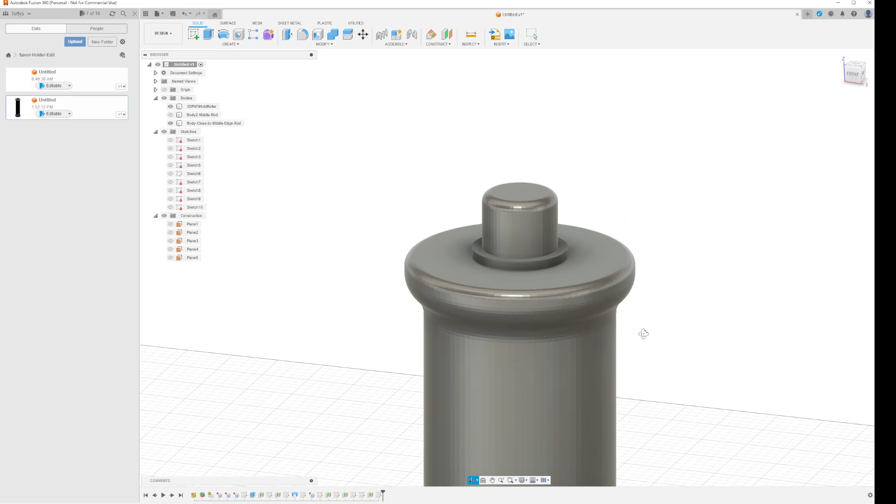If you see, I have a shape here in Fusion 360, and I want to replicate that shape more or less exactly as it is. Now, the best way you can do this is to use the points in 3D space. So I did that. Let's see if I can find a sketch. So you see, when I watch it from the right side, it looks perfect. And that's basically how I modeled it.

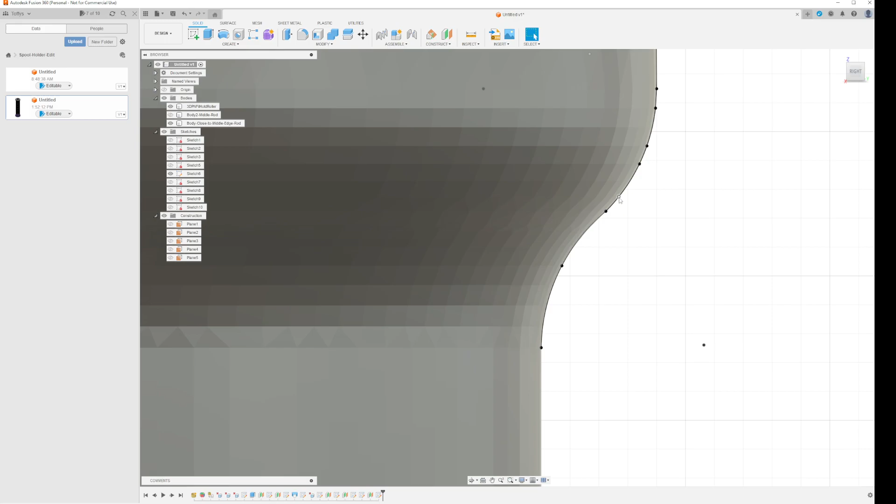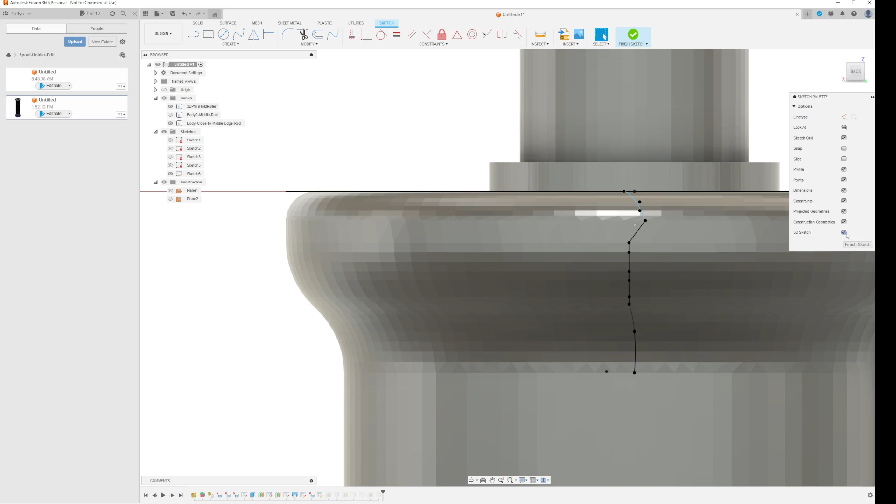I did like this, made a point, made a point, made a point, made a point. This is how the sketch looks when you see it from the right side when I drew it. But the problem comes when you want to create something with it, and you look from the other side, because you're drawing in 3D space. It looks like this. Now, how do you get everything on one single plane, one line, one axis?

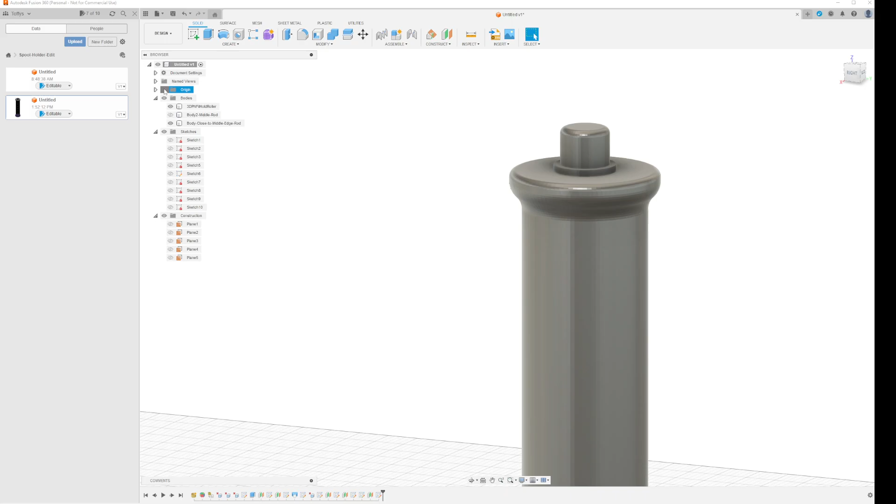I found one way to do this. Let's just first close down that one, and then I turn on origin, and you find the origin plane here. So you select the origin plane you want to use. In this case, I want to be on the green axis. See here, I want it to be on the green axis. And then, after I mark it, I go up to construct and I create offset plane.

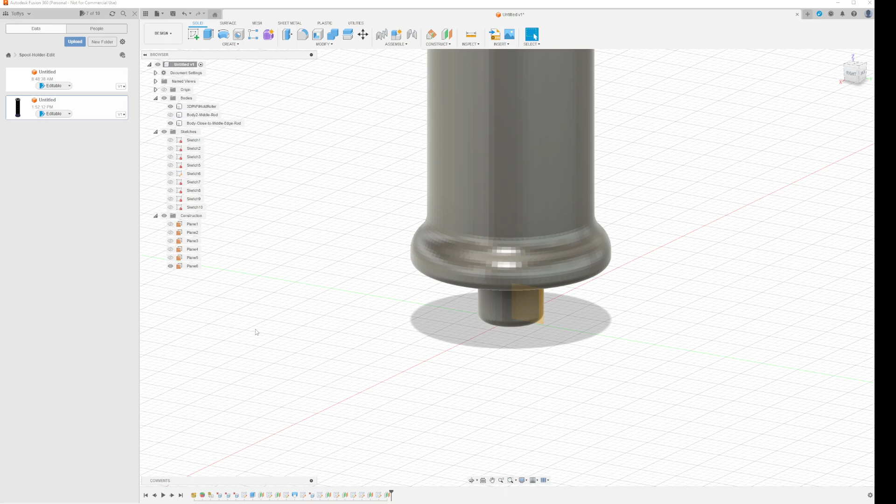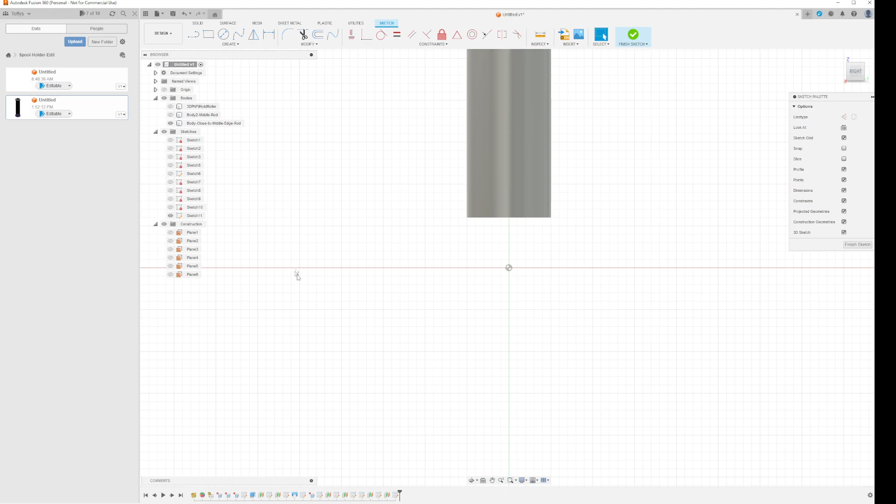And then leave it at 0. And then turn off origin. And now I have an offset plane at 0. So I disable the model, right click on that offset plane, create sketch. And now I have a sketch that revolves around the whole 3D space in that plane. Now, how do I get these points here? I want all of them to show in the same sketch, but at the same axis.

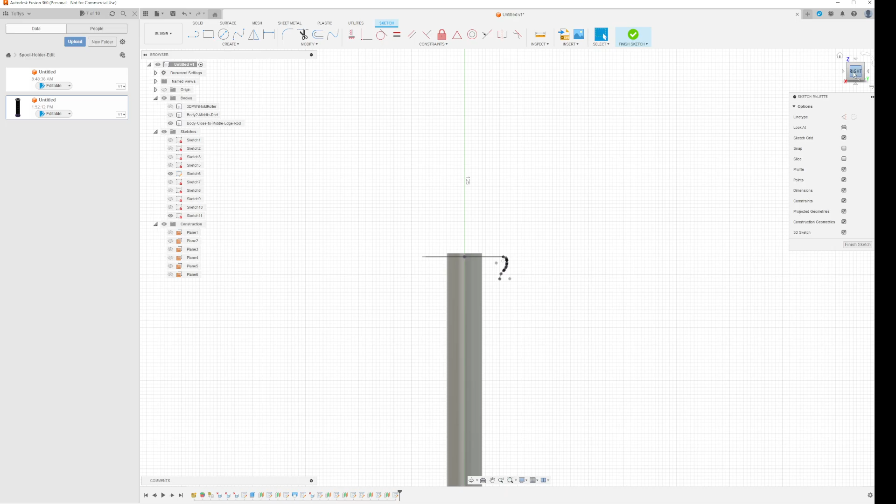So here, and then I need to find the model I have. Let's see, is it that? No, I didn't put names on this. There it is. So you make sure you're on the right space, you're oriented on the side, and then you click P for project, and you can either just select all the lines like I have done here, or if you also want the dots, you have to select them manually.

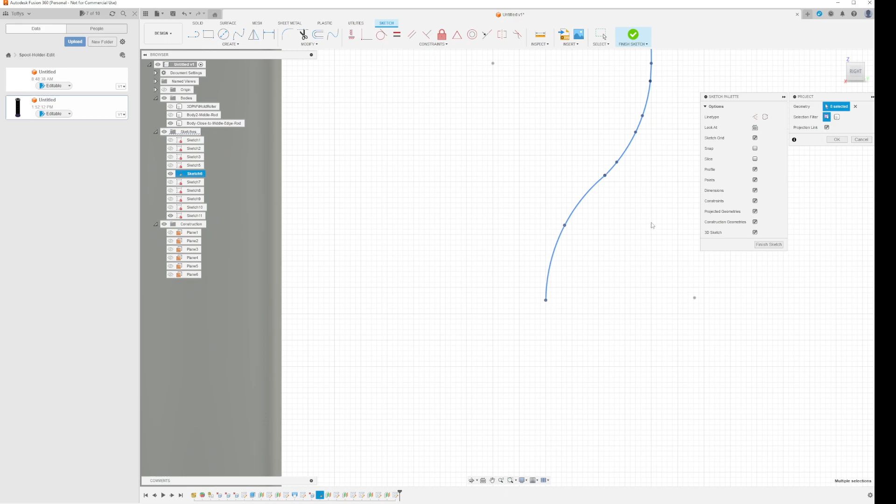Actually, there is another way to do this. You can just click select, freeform selection, just draw around it like this. Voila, now we have selected the points as well. And I don't want this, so I'll unselect that one. And then you click P for project. Now I have 51 selected. I don't want this. Anyway, I'll remove that later.

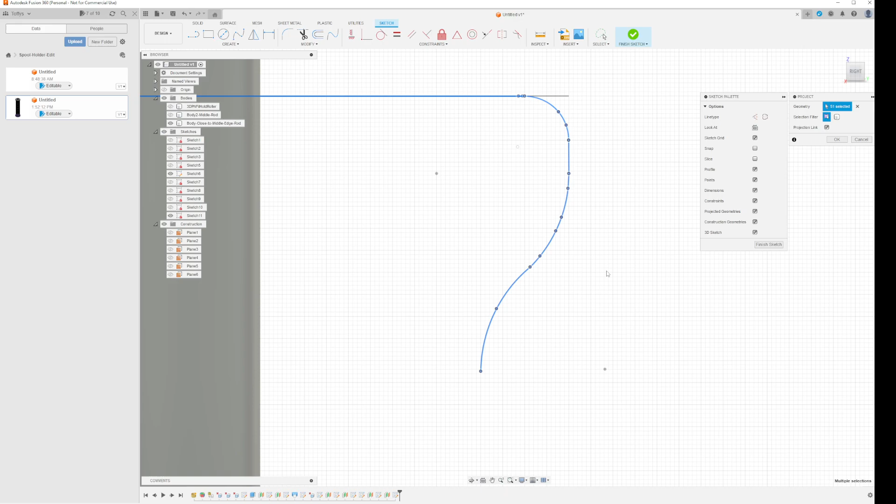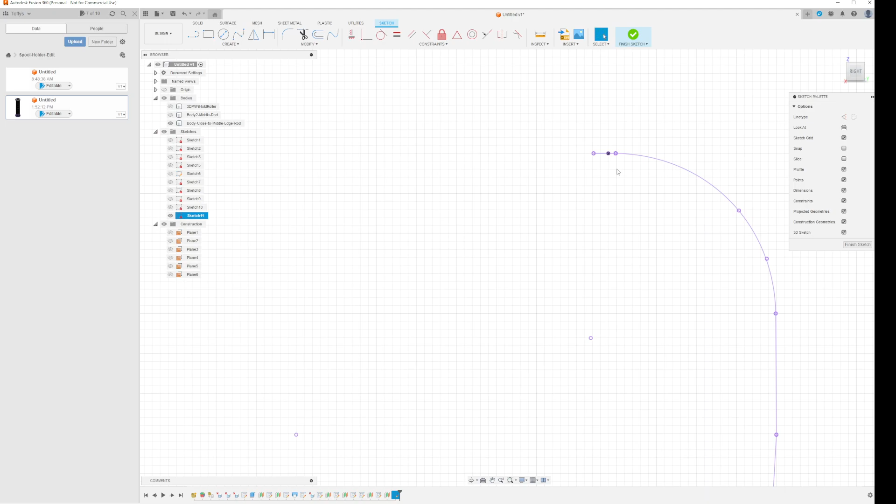So I have all of these selected now, and then I click OK for project, and you see I get it. Remember, I'm working on the sketch on the offset plane. And now I can go in and remove the previous one, because I don't really need it. And what happens now is that if I show this from the right side, it now has aligned all the points and the lines according to the right side, and it's actually all here.

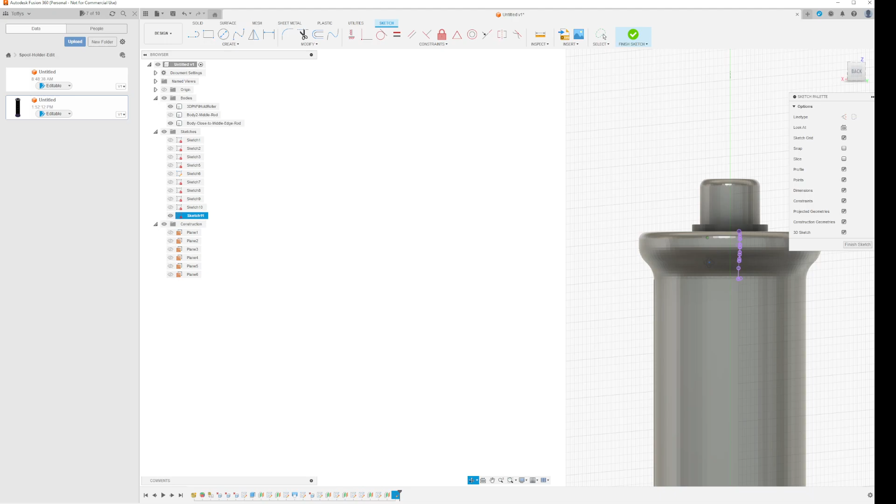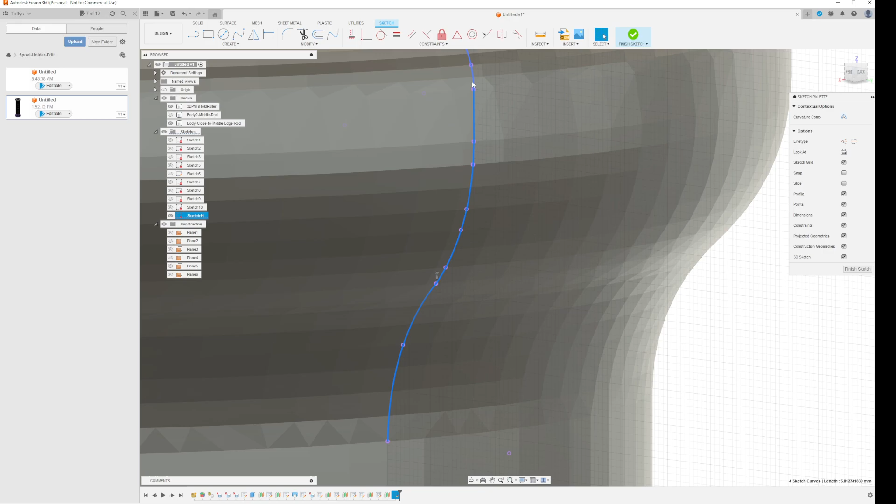And if you rotate it, haha, they're all perfectly aligned on an axis. So if you now want to, let's say, revolve this sketch, you can do that. Like this. So I want to revolve that. Solid. Revolve.

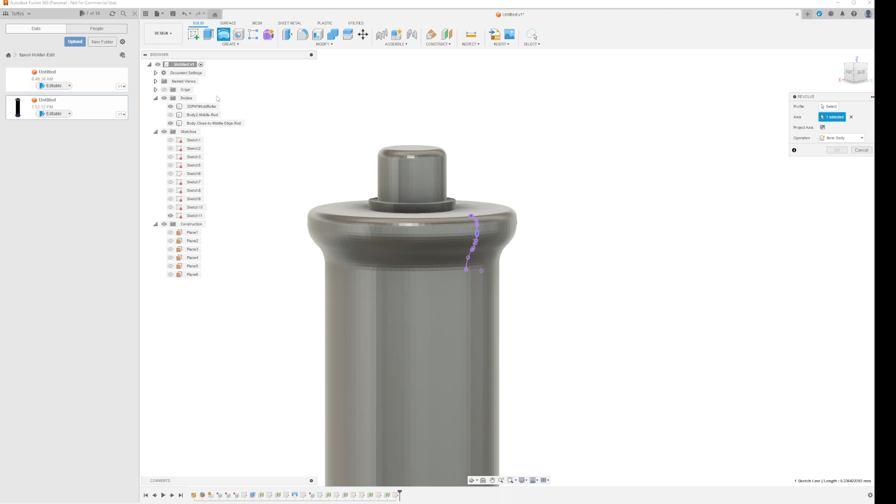So I want to just remove this so I can. Actually, that didn't work so well. Anyway, you got the idea. That's how you bring it into just one axis on one line. Basically use project. Thank you for watching.